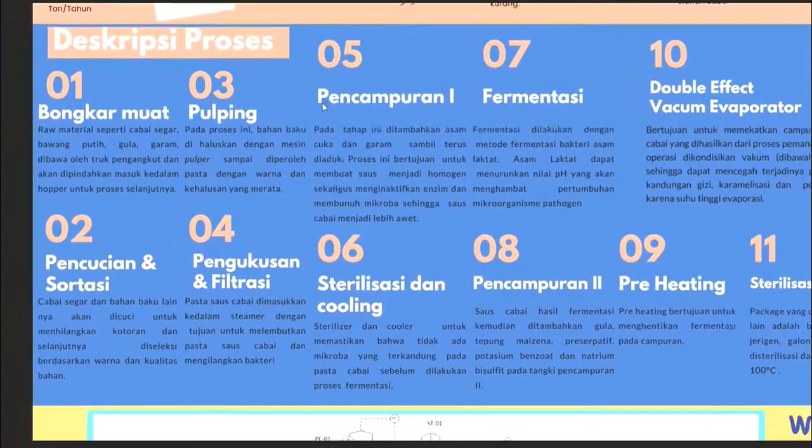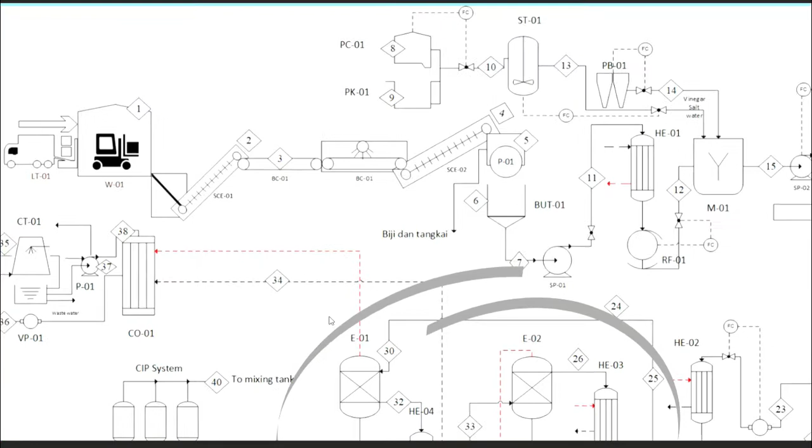All raw materials, both fresh raw materials such as chilies, garlic, sugar, salt, and thickener, will be controlled upon receipt of goods. Fresh chilies are the main raw material for making chili sauce. The fresh chilies used are evenly ripe and red, still fresh, not rotten, and free from pests and diseases. Raw material comes from a supplier who sends it by truck. Raw material received must be according to standard.

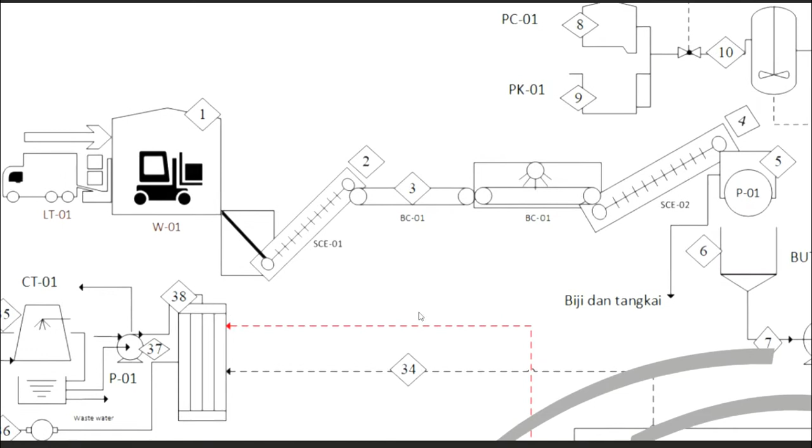Before entering the process, the fresh raw materials received are stored in the warehouse as a temporary storage place. Raw materials stored in the warehouse must be processed immediately to maintain their quality. From the warehouse, raw materials are transferred to the hopper to facilitate the process of transporting raw materials.

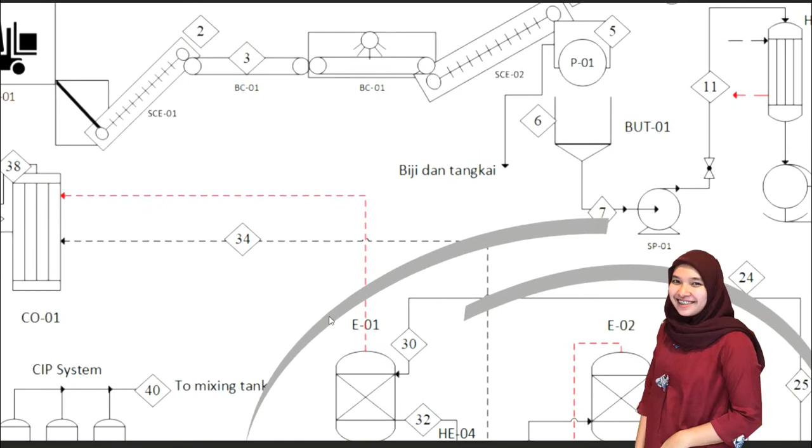Chili sortation process: from the hopper, the chilies will enter the conveyor belt through the elevator conveyor scraper. Sorting the raw materials is done by color, damage, and size, to get rid of raw materials that are moldy, rotten, or badly damaged so that they cannot be used as ingredients for making chili sauce. Sorting is done manually by labor.

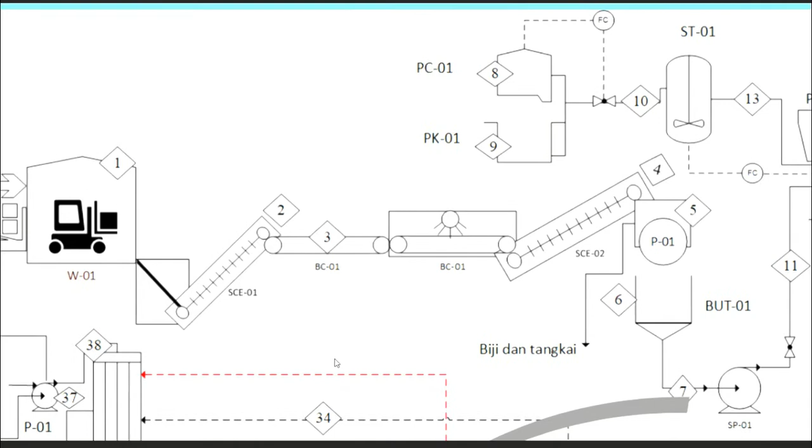Chili washing process: after the selection, chilies have the stalk removed and then are washed. Washing aims to remove dirt and pesticide remains, and then they are dried until dry.

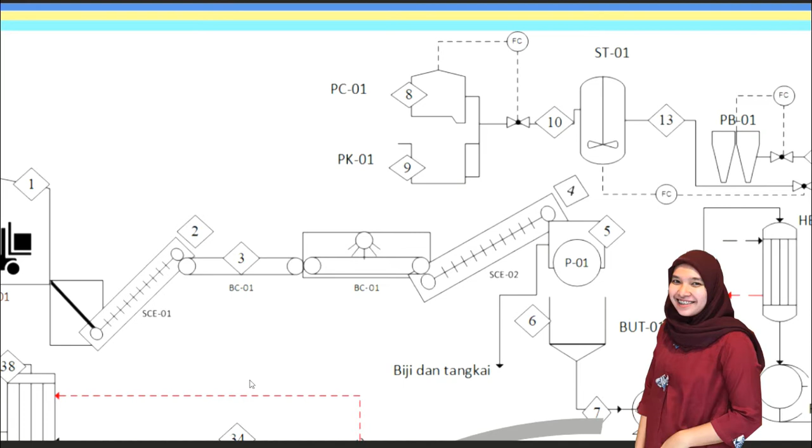Pulping process: after the chilies go through the washing process, they proceed to the pulping process using a pulper machine. This process aims to smooth the chilies to make the process easier, with principles similar to using a blender. In this process, the output of chili is obtained in the form of a paste.

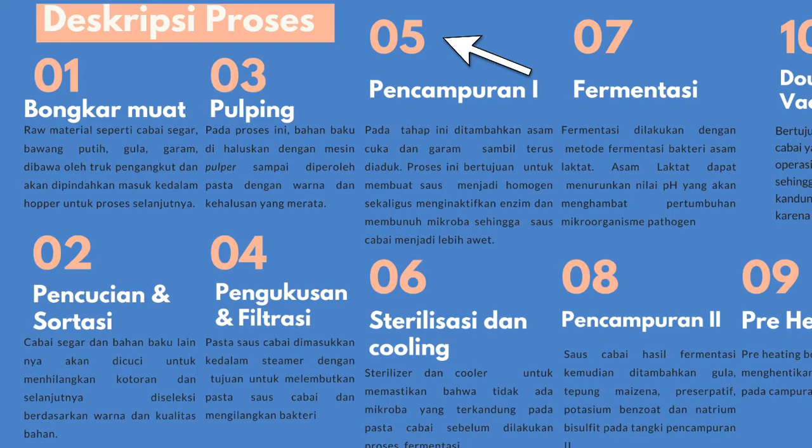Mixing process: the chili paste in the buffer tank is flowed using a screw pump to the mixing tank. Mixing is done by continuing to stir.

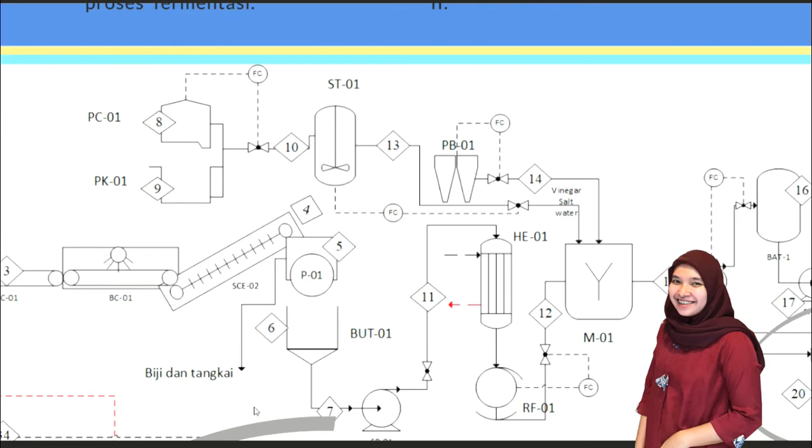The mixing process aims to make the sauce homogeneous and well blended. The water content of the sauce is lower as part of the water evaporates, so the resulting product becomes thick. Mixing also aims to inactivate enzymes and kill microbes so that the chili sauce will last longer. Stirring continuously and slowly, then add the melted vinegar while continuing to stir. Likewise with other additives such as salt; stir for 50 minutes to get a homogeneous chili sauce paste.

Sterilization: after the temporary storage tank, the chili paste is flowed using a screw pump into the sterilizer, in order to ensure that no microbes are contained in the chili paste prior to the fermentation process.

Cooling process: in addition to steaming, the mixed chilies are also put in the cooler with the aim of eliminating bacteria by killing bacteria that are resistant to cold. Cooling is carried out at a condition of 4 degrees Celsius and a pressure of 351.33 kilopascal for 600 seconds.

The next process is fermentation. After going through the sterilization process, the chili paste obtained is put into a plastic drum or fermenter for 6 months. The process of filling a plastic drum is called a filling station.

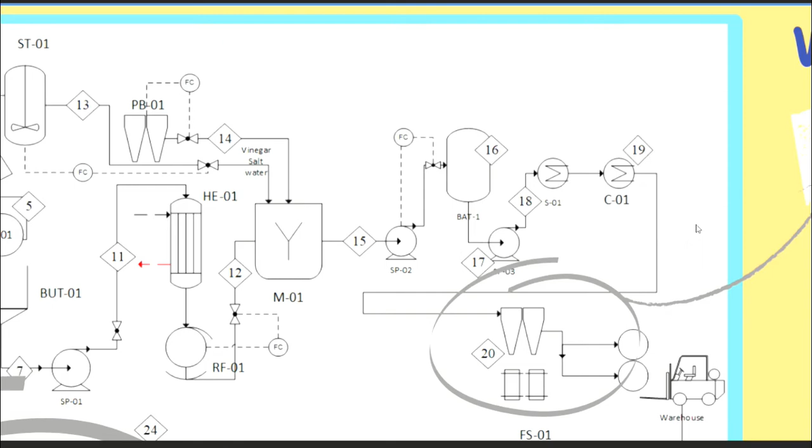The processing of chili sauce, made from fermented chili, uses the lactic acid bacteria fermentation method. Lactic acid fermentation aims to produce lactic acid, which functions to lower the pH value so that it will inhibit the growth of several types of pathogenic microorganisms.

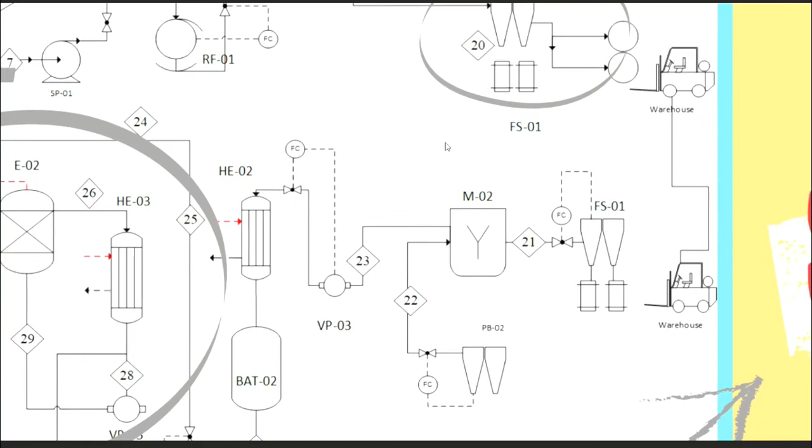The next process is second mixing. The fermented chili paste that was previously stored in a plastic drum will then be put into a second mixing tank to be mixed with sugar, cornstarch, preservative, potassium benzoate, and sodium bisulfite.

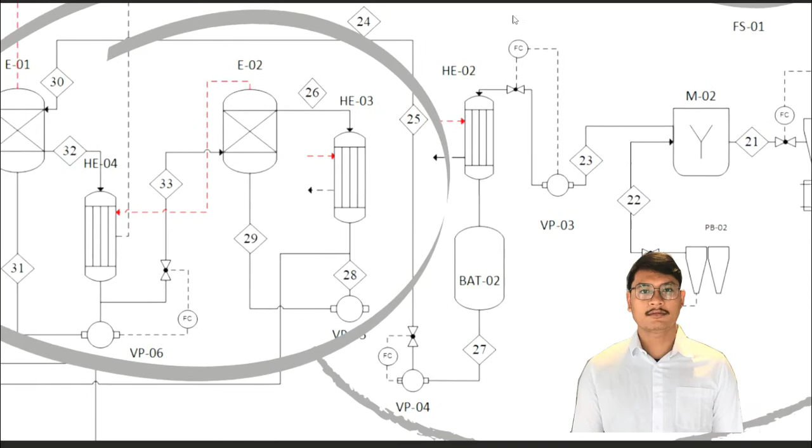The next process is preheating. The mixture obtained from the mixing tank is put into a heater to be heated in order to stop the fermentation of the mixture. The heater is used at a temperature of 120 degrees Celsius, pressure of 300.33 kilopascal, for 600 minutes.

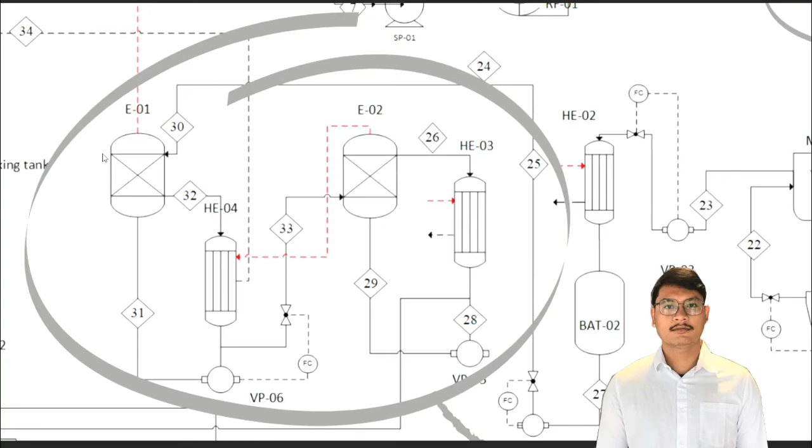The next process is the double effect vacuum evaporator. After heating, the chili paste mixture goes into a temporary holding tank or balance tank, then is flowed using a vacuum pump into the double effect vacuum evaporator, which aims to concentrate the chili paste mixture by reducing the water and steam content produced from the heating process.

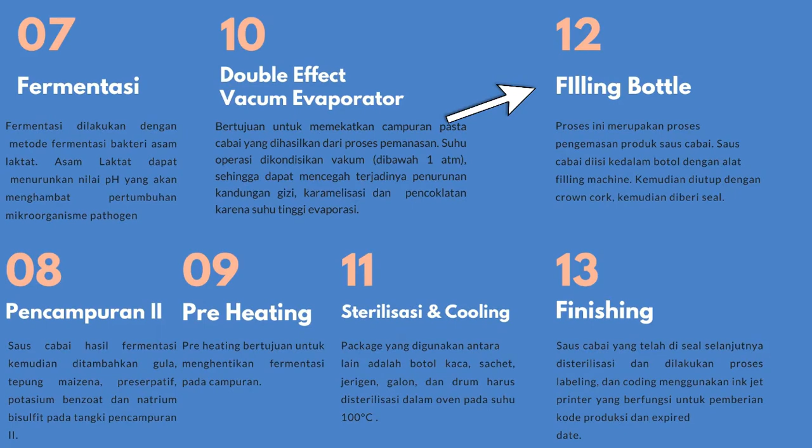The next process is filling bottle. This is the process of packaging the chili sauce product. Chili sauce is filled into a bottle with a filling machine, then covered with crown cork, and sealed.

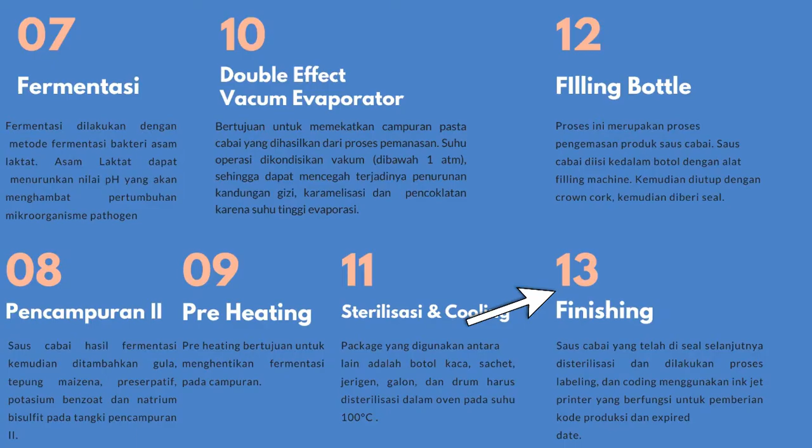The last process is finishing. The sealed chili sauce is then sterilized and labeled, and coding uses an inkjet printer that serves to code the production and expiration date.

What's new in our process? The first one is fermentation and the second one is the double effect vacuum evaporator.

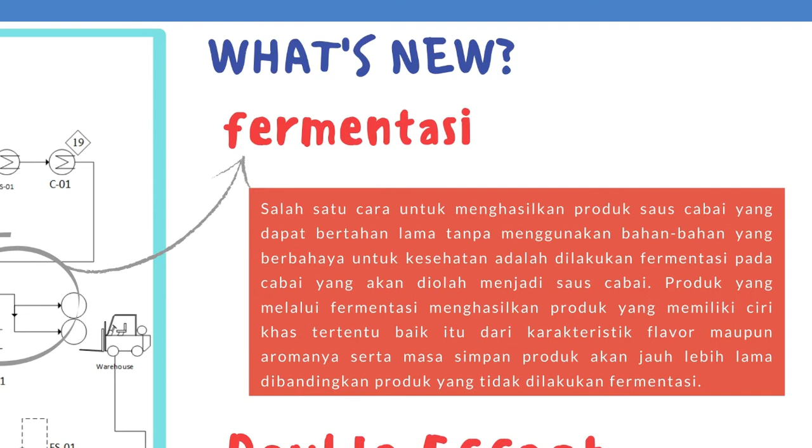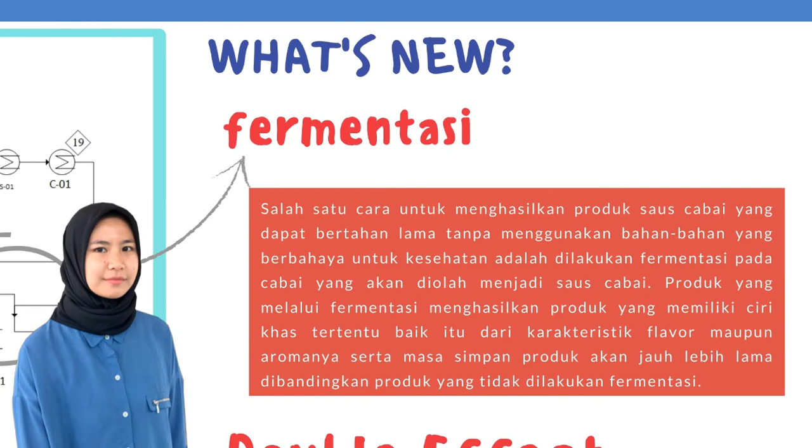First, we're talking about fermentation. One way to produce a chili sauce product that can last a long time without using ingredients harmful to health is to ferment the chili before processing it into chili sauce. Products that go through fermentation acquire certain characteristics, both in flavor and aroma, and the shelf life of the product will be much longer than products that are not fermented.

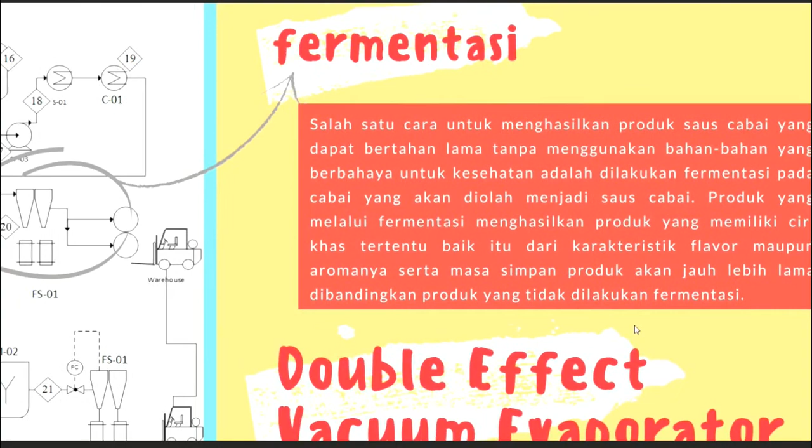Now we're talking about the double effect vacuum evaporator. It is evaporation equipment modified with a multiple evaporation process, working at a pressure below 1 atm. The main principle is that steam energy produced from evaporation of materials in the evaporation chamber of the first body can be saved by reusing it for evaporation in the second body.

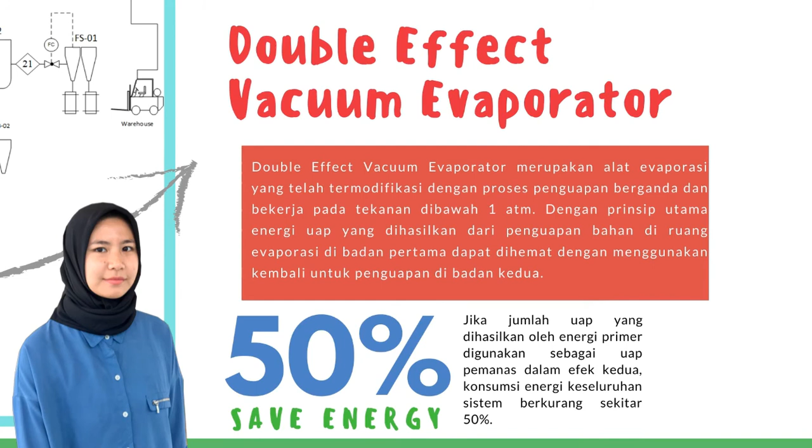And FYI, if the amount of vapor produced by primary energy is used as heating steam in the second evaporator, the energy consumption of the overall system is reduced by about 50%.